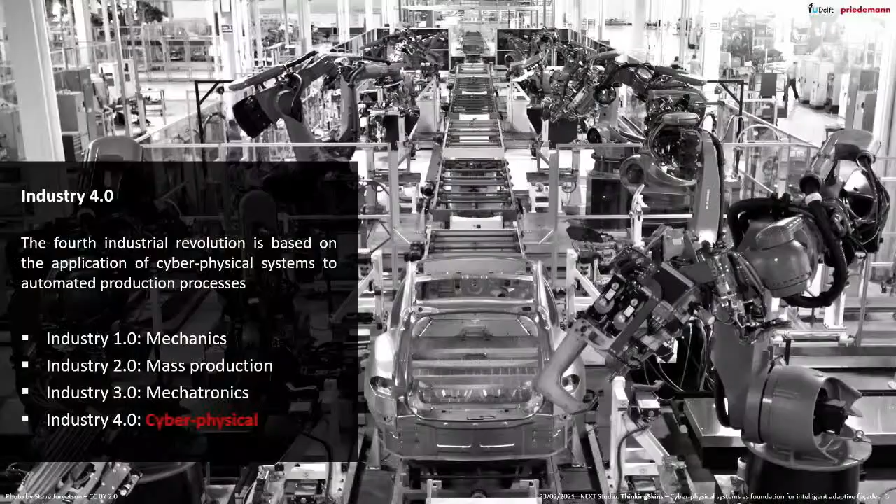And there also was one unit focusing on Industry 4.0. It was called the ITS OWL. And by coming across this, I started to be curious and wanted really to know what Industry 4.0 is about. And what I had to learn is that this addresses the fourth industrial revolution. And after the introduction of mechanics, mass production, mechatronics, now cyber-physical systems are the main driver of what they develop here as smart factories.

So this directly led me to the question, what are cyber-physical systems? Another keyword and term. There is no universal definition for cyber-physical systems today. This is because there are so many application fields, and the understanding of a cyber-physical system differs from application to application. Instead, today we use characteristics to describe such systems. They all can be described by the close integration of the physical devices and their digital control. And one key aspect, which is also visible here, is the embedding of the devices.

It means that we no longer have a central control, but we start integrating computing capacities into the devices, so we equip them with their individual intelligence, and we enable them to communicate with each other and to cooperate towards a common production objective. And why does the industry do this? Because they expect a great increase of flexibility in production processes, but also in productivity, so a greater performance of their processes. This seemed very interesting for me.

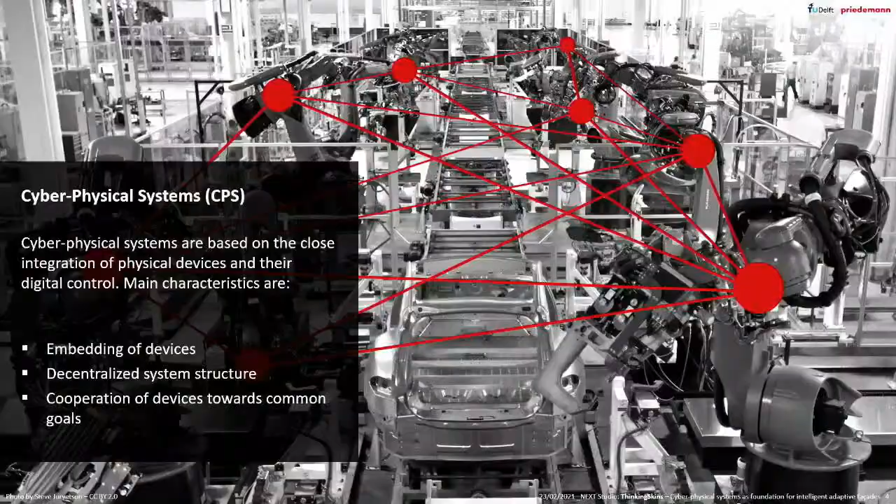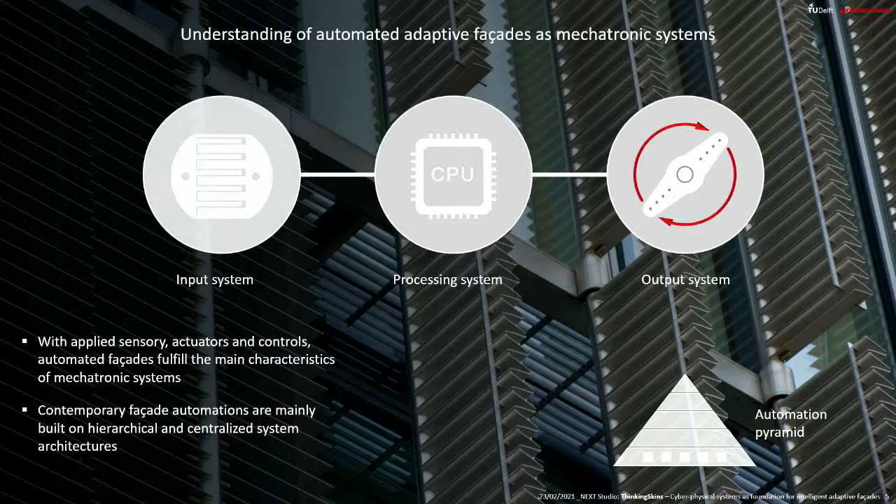And now coming to the actual topic of facades, we already know that automation is nothing really new for the facade industry. We, of course, automate many facades today. We integrate sensors, apply them to the systems. We have controllers, but also actuators that then actuate, for instance, adaptive facades. And following Jules Moloney in his estimation, with an existing input system, a processing system, and an output system, we can understand facades as mechatronic systems, which directly refers to the Industry 3.0 understanding. So it's centralized. Most of the facades today have a centralized and hierarchical control concept.

But this is the background I saw, which led me to this research question: how can cyber-physical systems be applied to facades in order to enable coordinated adaptations of networked individual facade functions? In this way of thinking, it means that the automated facade functions form a network. They communicate with each other and increase the performance by better mediating between the external boundary conditions and the user requirements that might also change. So it's actually about the shift from centralized and hierarchically controlled strategies in the facade towards a more decentralized control concept.

In order to be able to answer my question, I conducted several research investigations. They all were published as individual journal articles, and in the end formed the chapters for my final dissertation book. To give you a better understanding of what I actually did in each of the investigations, I will quickly dive into them. The first one was to identify all the relevant knowledge fields. The title of the paper here was State of the Art of Intelligent Building Envelopes in the Context of Intelligent Technical Systems. So I compared what happens in Industry 4.0 to what happens in the facade industry to get a common understanding and to be able to transfer the technology between both domains.

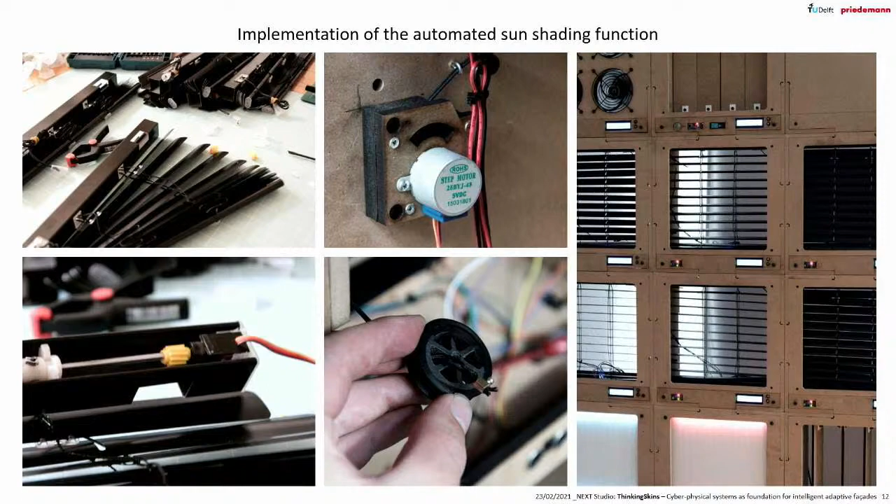It was not intended that the prototype works actually physically. It was more understood as a demonstrator, a visualization tool that helps to understand the process and the communication within the system. So this is the first function that I developed like this. You can also see I used some of my skills in digital fabrication to make my own devices, like a 3D printed wheel that then winds up the wires for the opening and closing. So in the end, you see the result on the right. This was the sun shading device.

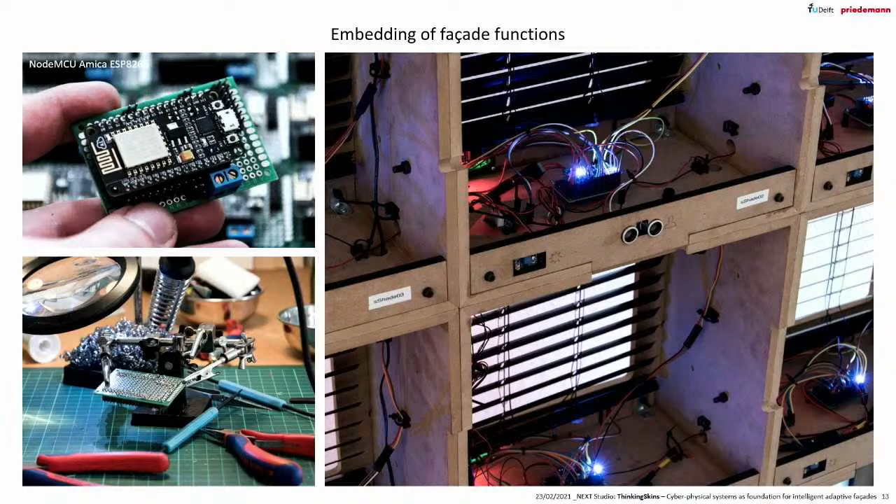A bit more complexity came up when I also had to provide these microcontrollers. I had to learn soldering and use these small microcontrollers, which were quite useful for me because they come with a network ability. They can directly join a wireless network. So I used these elements, and each of the functions that you just saw, each module, is equipped with one independent intelligence. It also has all the sensors necessary installed that help to perform the functions. So each function is an independent feedback loop, collecting all the relevant information, then processing this information, and bringing it to a reaction of the system.

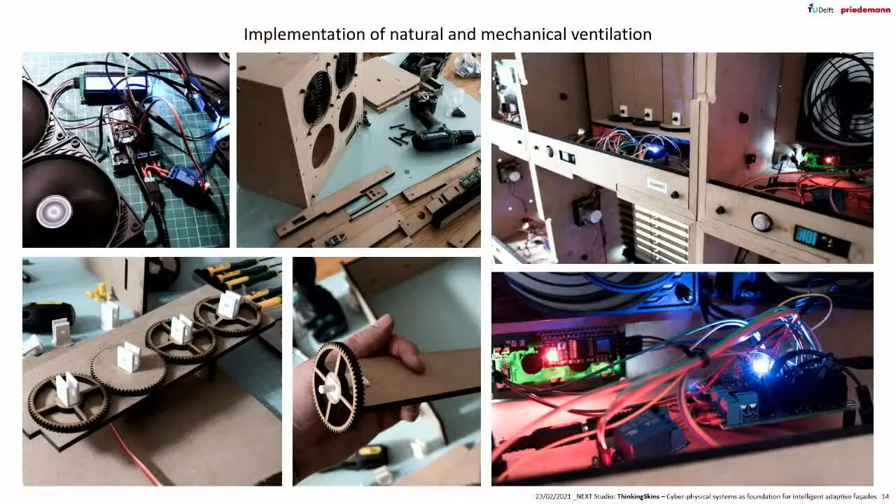This strategy I applied to all the functions that I covered in my prototype. What you see here is the development of the ventilation system, which is covered by natural ventilation. Here I again digitally fabricated a gear system on our laser cutter in the university, and I also 3D printed these small devices here and assembled them. Everything was considered to be plug and play. This was also the reason for me to start learning soldering, because this can easily be disassembled, and it was quite important for me to make sure that if something fails in this more high-tech solution, I am able to just replace broken devices.

The other ventilation is the mechanical ventilation. Again, I used a standard product, which is just a computer fan, and you can say I tuned it, hacked it. It was then possible with a relay to switch it on, off, or also change the speed by PWM. So after finishing all these functions, I had some kind of a playground with different working functions that I could start playing with the communication.

What you can see here is the realized functions on the right side. By the way, I didn't expect so many LEDs placed into these devices, so when it was finished around Christmas, it saved me the Christmas here, and there was a lot of illumination. This is no photo art, it just came from the pictures that I took because of the illumination here.

What you see is the realized prototype, but also here the communication comes into play. So I installed a router and the server, which is the platform for communication within the system, and I also added the power supply. Up to 5 volts, I was quite fine. This then added the 220 volts, where I felt a bit more in danger.

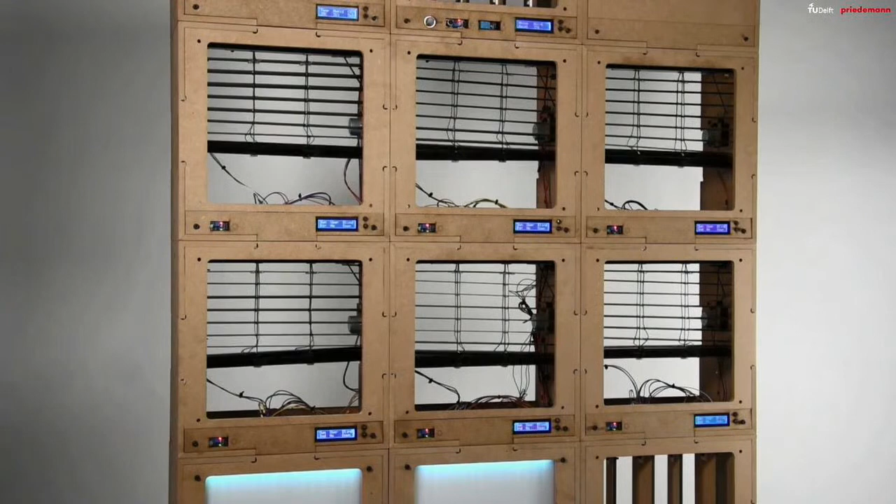I could talk much more about how I realized this prototype. Maybe it's easiest to just show it working, and this is why I show this video. What you can see is just the individual functions, like the shading system that opens, closes. I also installed displays, which helped me to evaluate the measured sensor data. You see all the technical stuff integrated here, and I was quite happy that all the functions directly worked.

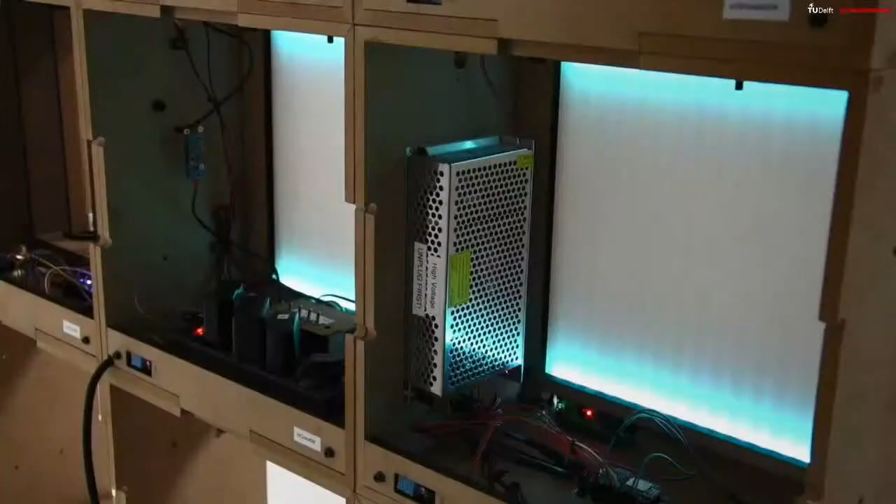In the back you also see the sensors, the light sensor, a distance sensor, which could also measure a person that approaches the facade. Here you see again all my switches, the power supply, and in the background it's the heating and cooling function, which is demonstrated by the blue and the red LED illumination.

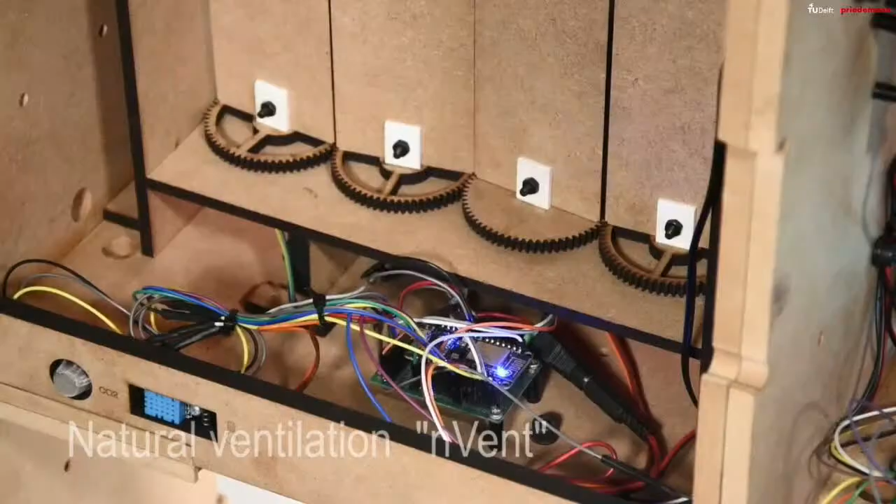The next function here is the gear system for the natural ventilation. Again, you see the applied microcontroller as a local control. The sensors installed are a temperature and humidity sensor and also a CO2 sensor, and it could visualize 3 states like open, closed, and half open. And last but not least, the mechanical ventilation. I just explained also that different speeds and on and off were possible with this function.

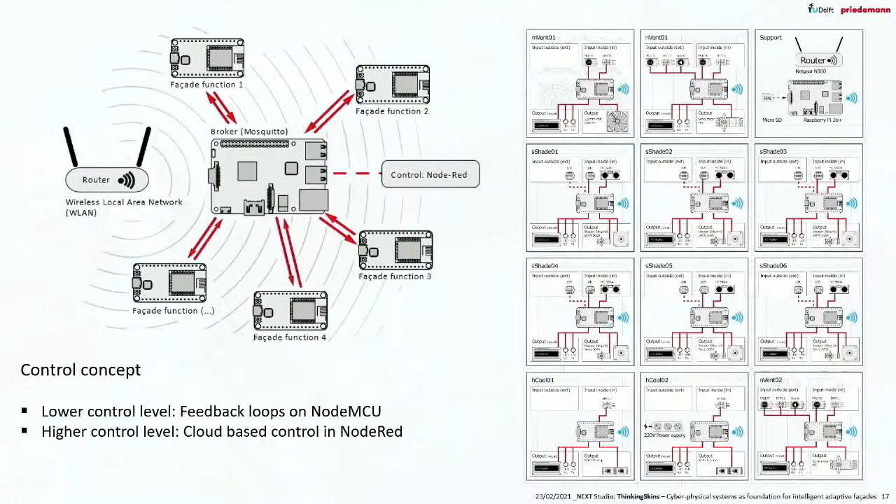What you just saw is the feedback loops on the lower control level. So it happens locally within each function based on sensor data. More interesting it became when communication came into play. This means that there is a second higher control layer where all these aspects of the prototype communicate with each other. And again, I could explain a lot about MQTT, machine-to-machine communication, but maybe it's just easier to demonstrate what happens here.

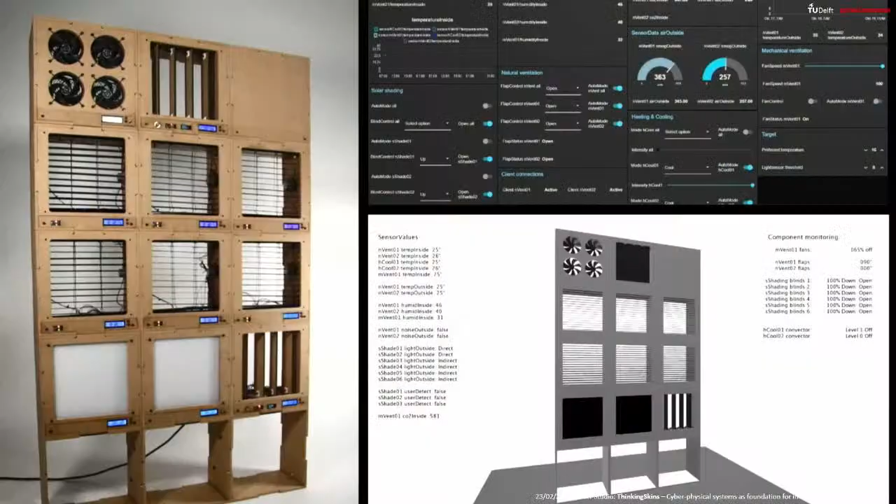Each LED that you see here blinking means that a message is sent from one of the modules or received. So all these functions communicate with each other, but also with the digital representation, the digital twin, which receives the information. And also the user interface was an important aspect because it enables to interact with the system and to validate what was going on.

How to evaluate the system in the end? I mean, of course, I saw that some things were working, but to evaluate the potential of communication, I did these small scenarios that I imagined. Again, it was not about the physical performance, but more about visualizing how the communication could help in a facade. In this situation, the natural ventilation also has a noise acoustic sensor.

It receives a disruption, and it knows now, okay, I should close the natural ventilation. But it doesn't only close, it also tells the mechanical ventilation that this is the case and hands over the tasks. And after a while, when the signal is lost, it takes the job back. So this was just one scenario to prove these two functions can communicate, they can talk and share information throughout the system. I did this with in total 5 scenarios.

I will just show one more, what I called community decisions, because what you see here is different instances of the sun shading module. They all receive the information that there is some light and they should actually provide sun shading. Just one function is tricked with some tape, so it gets wrong information. And what happens on the higher control level is that all the others say, you received the wrong information, and they override what's happening in this local control level. So again, these functions communicate, and in the cloud, decisions are made that can also help to get more flexibility within the system.

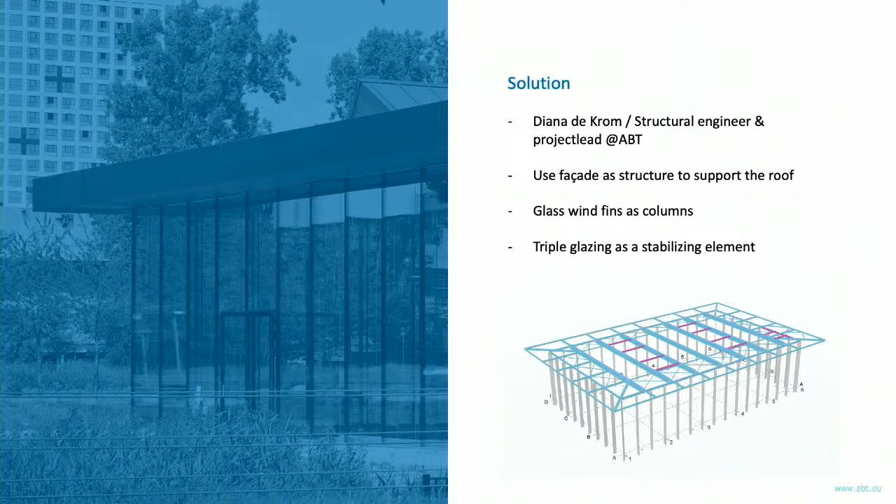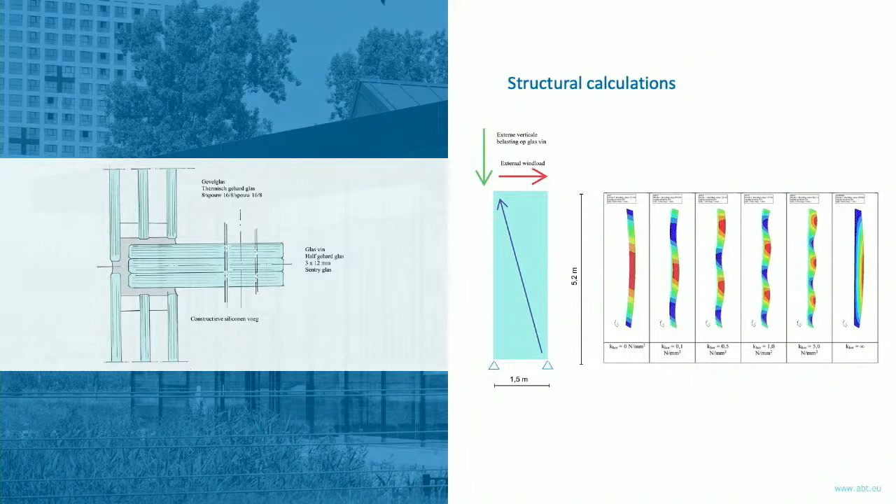Next step is how to make calculations about these structures. They made elaborate calculations, and they researched all the different scenarios that were possible for the loads and the structure. I'm not a structural engineer, but I was really impressed by the schemes that I saw in the project folder. You see the image of one of them on the right. And it turned out to be possible to execute this design.

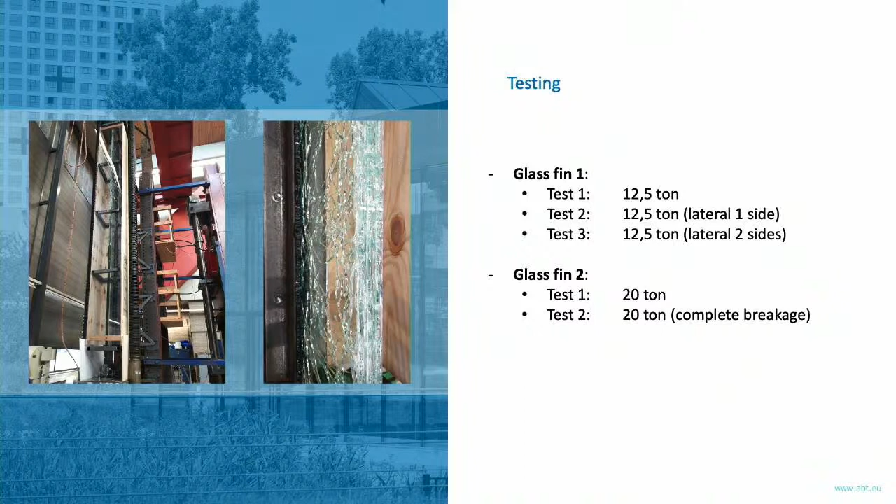But the calculations by themselves were not enough. So Diana thought it was a very good idea to test it in practice. Together with the university, the TU Delft, they executed these tests. As you can see, there were quite heavy tests on the first glass fin. They executed a triple test of 12.5 tons in 3 different ways, with 1 lateral breakage, with 2. And they all succeeded. Then came the second test, which was even heavier. The last test was with 20 tons and with complete breakage of all 3 layers of glass, so the fin was only connected with the structural interlayers. And it succeeded as well. For 10 minutes, it could bear the load of 20 tons, with a fin length of 5.2 meters. So quite remarkable.

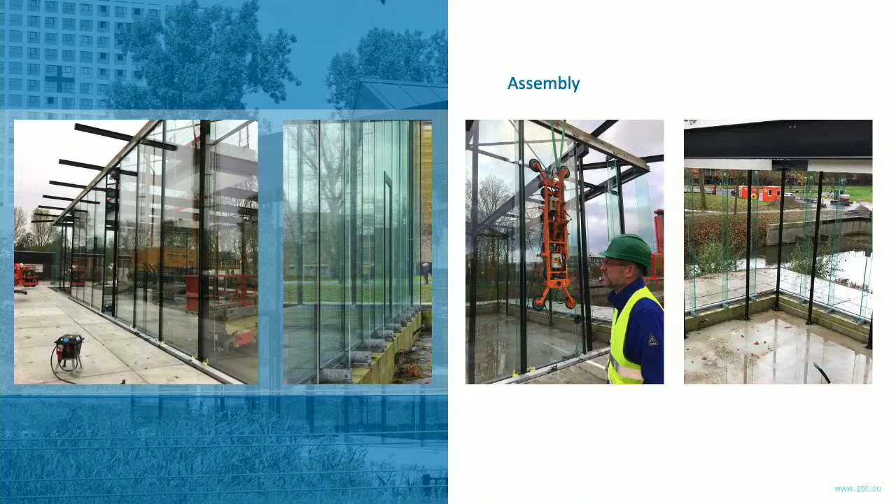Okay, so the calculations succeeded, the testing succeeded. Next step was production and assembly of the elements. Here you see a few pictures of the assembling process. Quite large panes, quite heavy elements, and it had to be temporarily supported by some very light steel columns. But when every glass fin was in place, they removed them, and the architectural roof really landed on the fins, and it was quite a remarkable result. So here it is: a fully glazed facade with no steel structure, completely bearing the loads of the architectural roof.

And in the end, also with some nice sustainable results, because glass has a lower CO2 footprint than steel. It's recyclable, and using only the glass really saves material in the end. So this is story 1. So this shows that by looking in a different way to facades, you can come up with really nice results.

Yeah, the second story. The second story is about the Naturalis Biodiversity Center, and maybe you know, maybe you don't, but it's two things. It's a research institute, and on the other hand, it's a natural history museum. So it was a renovation, and they also planned a new building next to it. And what you see here is the facade of the new building.

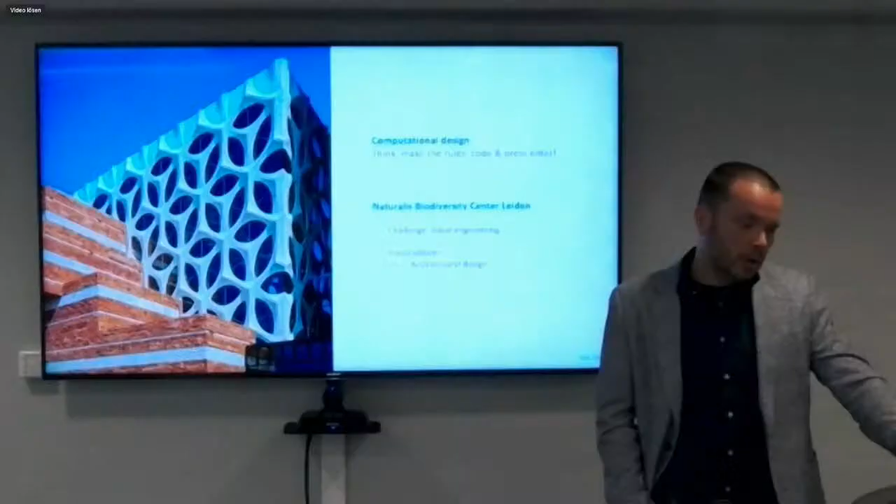ABT was commissioned by the architect, Neutelings Riedijk Architects, to take care of the structural design and also the site supervision. And during this assignment, we were challenged to optimize the crown facade, as they call it, and it's the white facade, as you see on the picture.

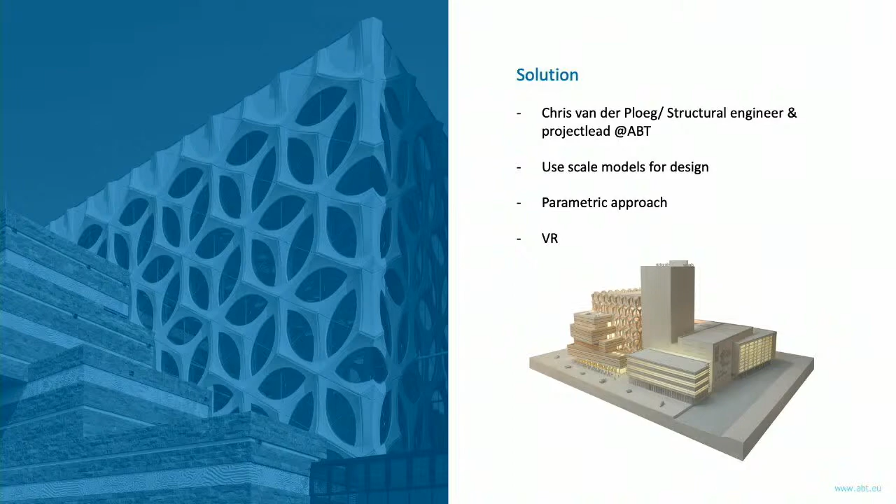My colleague Chris van der Ploeg and his team started working on this, and they used all different kinds of methods for it. They used the scale models that were available, and step by step they came to the solution that a parametric approach would be very useful for this project. So in the very beginning, they made a 3D model, as maybe you can see on the left, and it was in AutoCAD. But soon they switched to Revit to use a better 3D model software for it.

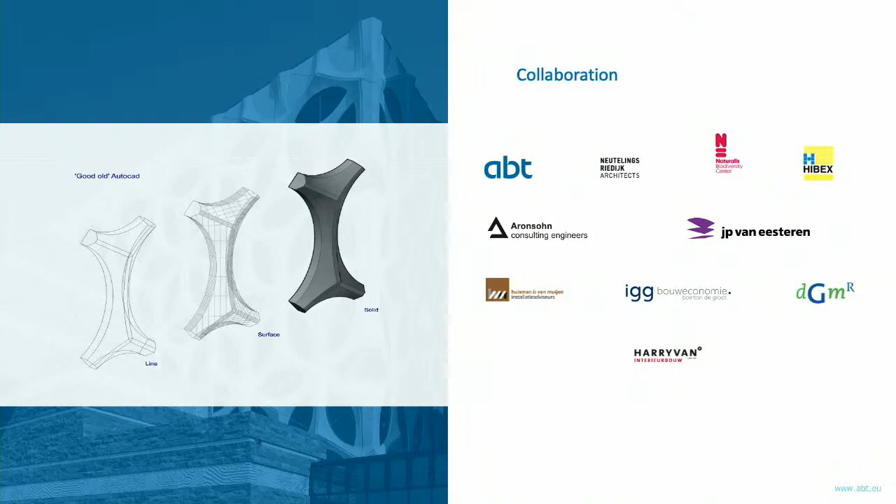According to Chris, parametric modeling requires a different mindset. And he explained it to me in 4 steps. He says, well, first think. Second, you have to make the rules. Third step is coding. And if you do it in the right way, you only have to press enter. It seems really simple. Maybe it's not. I will show you in the next few slides how it works according to Chris.

So first step, think, seems logical, but sometimes it proves to be difficult. So it's good to realize that the thinking process really is one of the most important steps in this parametric approach. The second one was make the rules. Make the rules is 2 things: defining geometry, but also defining the rules for the design.

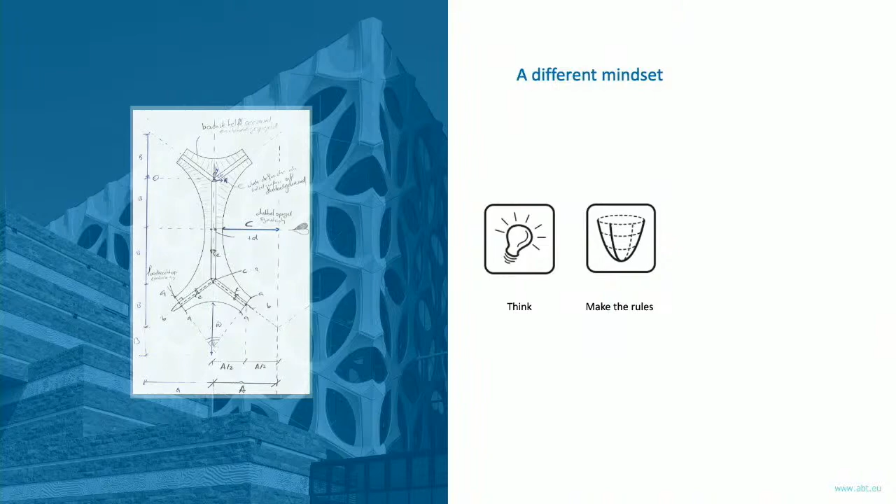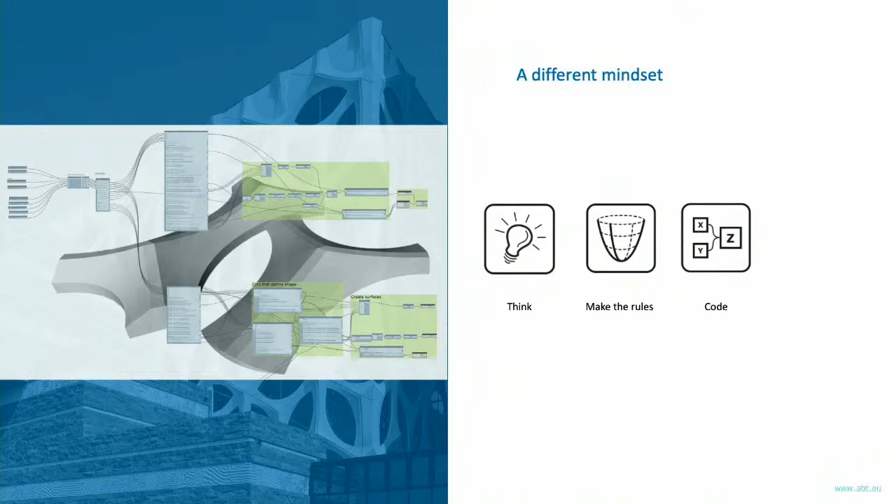And as you can see in the sketch Chris made, he really analyzed the shape of the facade. And after he did so, they started to code, and they used 2 software programs for it. The first one is Dynamo, and the second one is Grasshopper. And they managed to code this facade model and to link it to Revit. And after they succeeded in this, they were able to press enter.

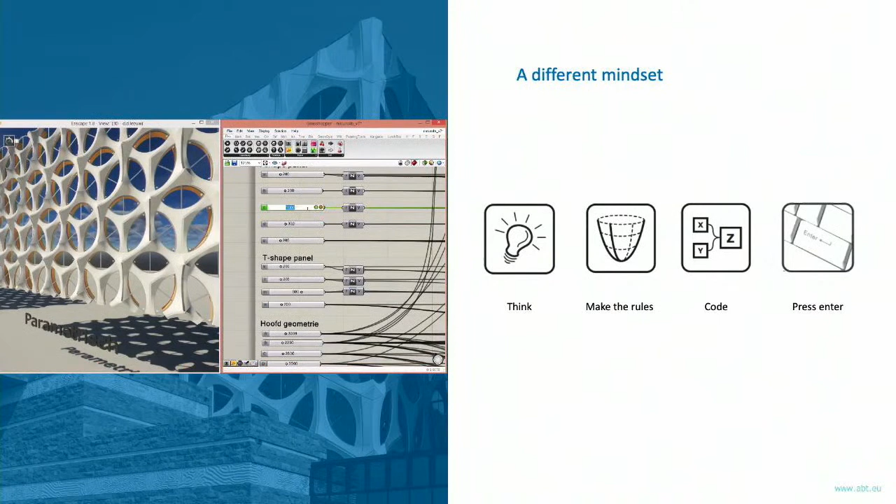And as you can see in the left image, you can see the changes in the facade. As the values change, you see the facade appearance also change. So maybe this one goes a bit quick. I can try to do it again. So the green values are the changes they make, and you see in the image of the facade what the effect is on the facade.

So in this way, they could look at all kinds of scenarios for the dimensions of the facade. And they also could analyze it in a proper and very elaborate way. So after they succeeded in this analysis, in this parametric model, they looked for a way to communicate it with the architect, with the members of the design team. So they decided to do this with virtual reality.

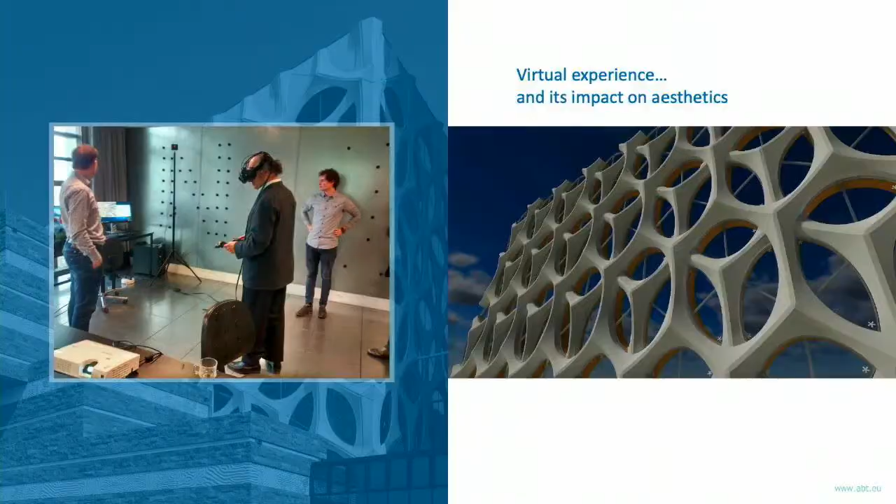So this was in the office of ABT. We asked the architect to look at his facade, and this is what he saw. So a virtual real-time experience of the facade. And he was able to make his choices, the right choices for him, but also for all the technical aspects that were involved, and also for the logistic aspects. And let me show you the results of this experience.

And what also was quite nice is that we managed to reduce the number of truckloads for the precast concrete facade elements by half. So there were 200 truckloads less needed than in the original design. So also quite nice sustainable benefits.

So that was my second project. I have one to go. And I saved this one for last because it also took the longest from the start to the delivery. We started with this one. First of all, it's about the Forum in Groningen. And it's a really big building in the center of Groningen. As you can see in the environment, it's like some kind of big rock has landed in the center of Groningen. And it has really specific characteristics.

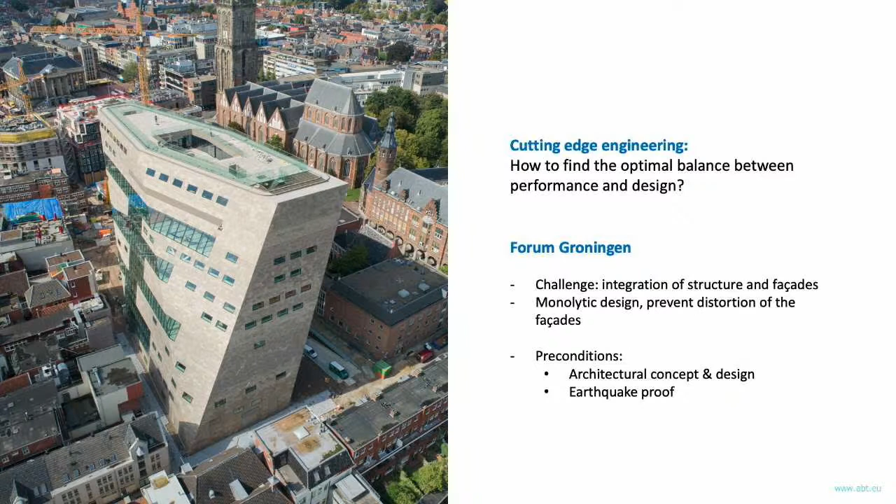We started in 2007 with the design team. And first, ABT was approached for the structural engineering. But soon after, we also were asked for all kinds of other engineering services, and facade engineering and facade consultancy was one of them. And a really important one, because the facade is really expressing the concept of the building. I was told it's meant to be a monolithic design. And that means that any disturbance and disruption of the facade has to be avoided.

And it's quite complex in a way, because it's such a big building, and it turned out later that it's also in an area where we have earthquakes in the Netherlands. So that made it extra complicated. But in the beginning, we didn't know that. So we just started with the design.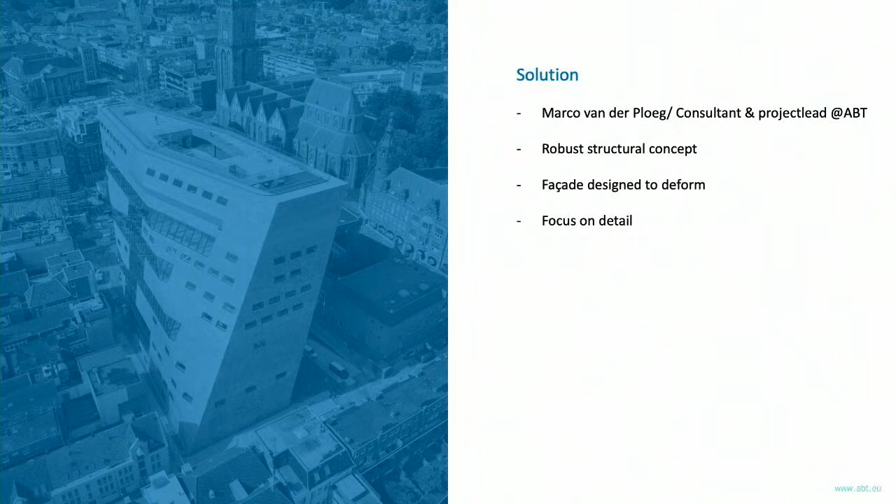My colleague Marco van der Ploeg, as far as I know, not related to Chris, but they have the same last name. He's a consultant and a project lead at ABT. And he took up this challenge with his design team. And he told me two things about the project.

The first one he told me is, okay, when you want to design a facade which you want to have no detail, you better start detailing, and you better do it well, because it's really crucial to the result. And the second one is, he told me that in all the decisions and all the choices they had to make in the design stage, the concept of the building and the concept of the facade was leading. So those were two rules Marco told me they started with in this project, and they continued it till the day of the delivery.

Oh, I have to go one slide back, actually. Yes.

What also was important were three main topics in the design. The first one is the structural concept, because the structural concept and the facade design are really strongly related to each other. And it all has to prevent all these distortions and disruptions in the facade. So it was a very important topic. The second one was that the facade is designed to deform, and that's different than many other facades. And the third one, I already told you what Marco told me about detailing: keep your focus on details. So those were the main topics for the design.

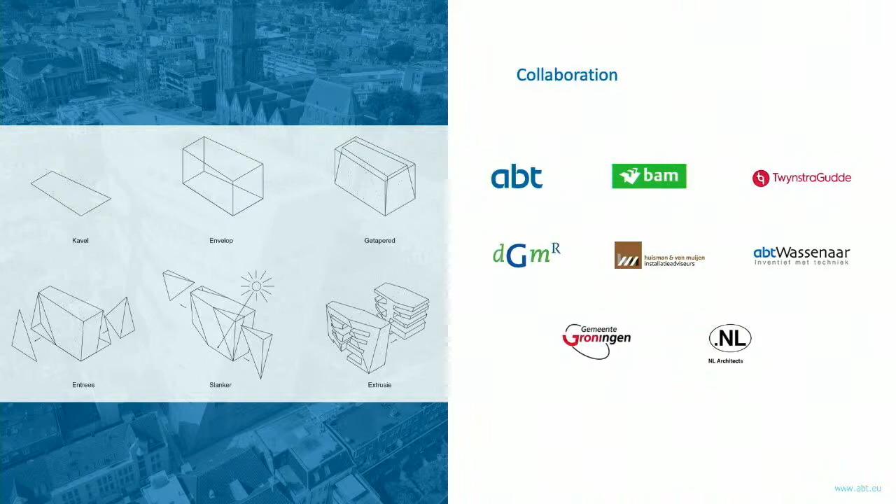Here you see the companies that were involved in the process, but also on the left side, you see how the creation of the shape of the building, and also the creation of the facade, happened. It was a really awkward plot, and they kind of used the shape of the plot to shape the building. And this is the way the architect did it.

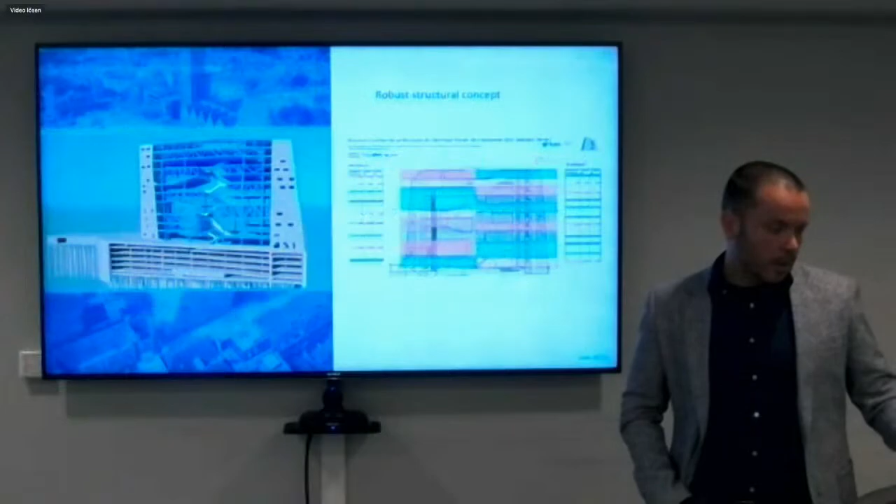So the shape was translated into this structural concept. On the left, you can see two concrete cores, and they are connected with a steel bridge structure. And it's very important because with this connection, you can avoid dilatations on the cores. So we don't have to make these dilatation joints where the cores meet the steel structure.

And it was also very important in 2012 when the earthquake problems occurred. Of course, the structure had to be reinforced at quite some points, but the concept was strong enough in itself that we didn't have to change the concept.

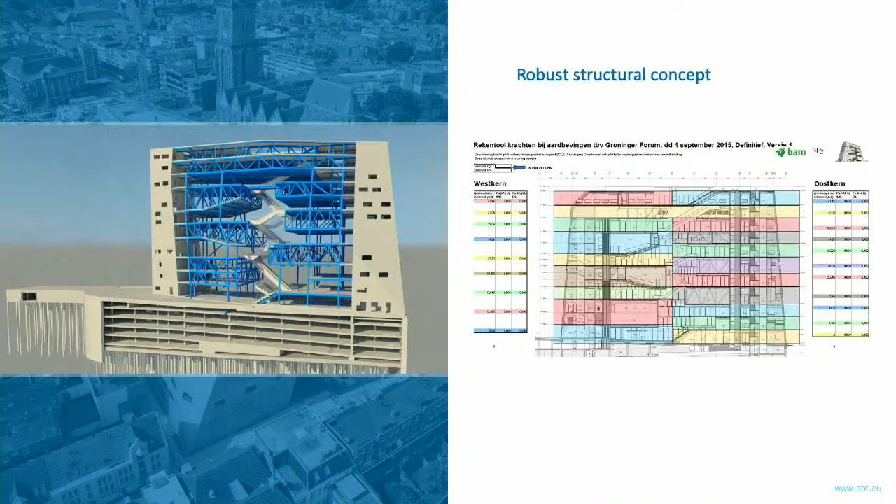And on the right, you see a seismic analysis, which colleagues of ours, ABT Wassenaar, made, on all the different layers and all the different zones in the building. And adjustments were made, but the structural concept was so strong that it could be maintained in the project, which was really helpful in the designing of the facade.

So, step 2 was, okay, we have this structure and we know what it does, and you see that it has really limited tolerances in the right sketch. The max tolerance, it's bending like 25 millimeters at the most. So that was also a starting point for the facade.

So we made a choice for a unitized system, and all the horizontal lines are functioning like a laundry line. So the unitized system is hung on these lines. And it functions more or less like a snake skin.

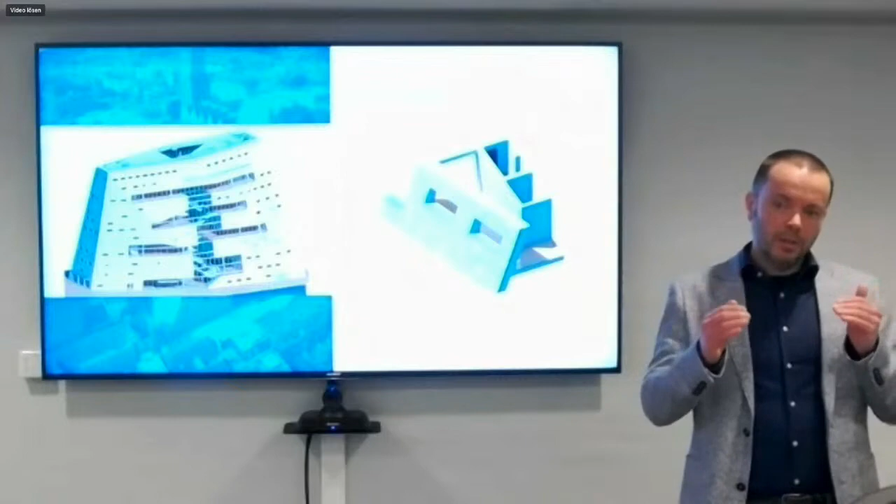Another special feature is that the facades are not at a 90-degree angle related to the central axis. And since they also have an angle to the vertical axis, the openings are not rectangular, but they have a wedge shape. In this picture, you see the concept: we have these rectangular boxes, they start with the central axis, and the openings are shaped around these boxes. So this is how the wedge shape occurs.

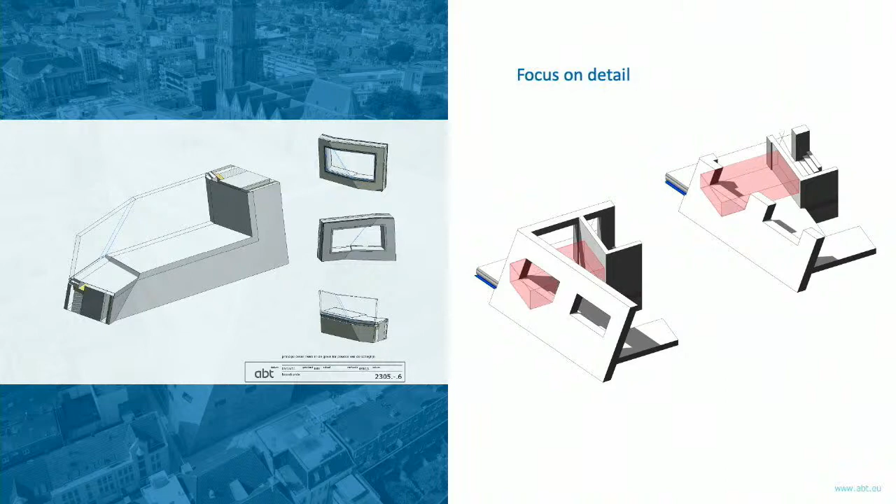And we really insisted on this principle, as you can see, even when facade surfaces rotated. So this was really consistently applied on all openings.

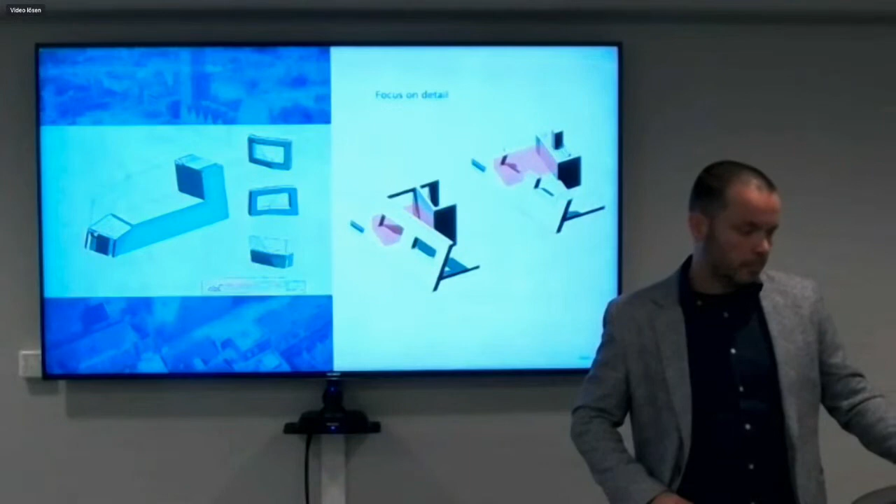I talked to you earlier about the focus on detail, and what was quite remarkable was that in the different design stages, the concept of the details hardly changed. Of course, because of seismic analysis, a few changes were necessary, for instance the bonding of the structural glazing. It's a bit different than in the DD phase.

And also the brackets to attach the system to the structure are much heavier than they were in the DD phase. But in the end, it was all complete flush detailing over the whole facade. The natural stone is really flush with the outer line of the glass pane, and you see it in the complete facade.

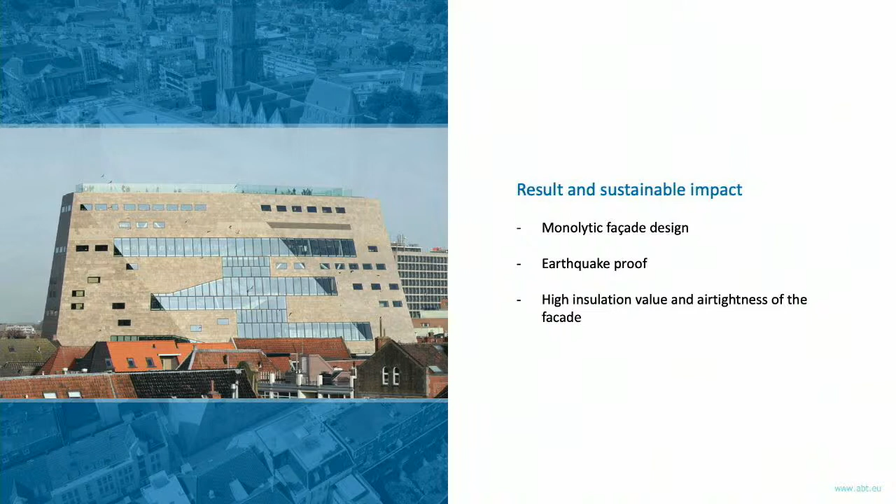So after 12 years of engineering, this is the result. For the time when it was engineered, it was really advanced engineering, and we were really proud of the result. I think we really managed to realize a high-end facade on this project.

Okay, I guess I'm running out of time a bit. I have 2 slides to show. Because we have these 20 minutes, I have to make choices, and I really want to show you 2 projects. The first is the Boijmans van Beuningen Depot, for which we were responsible for the facade design. The second one is Crystal Houses, in which we also played a key role in the facade consultancy. Maybe you could see it as a cliffhanger for next time, as we hopefully can meet in person.

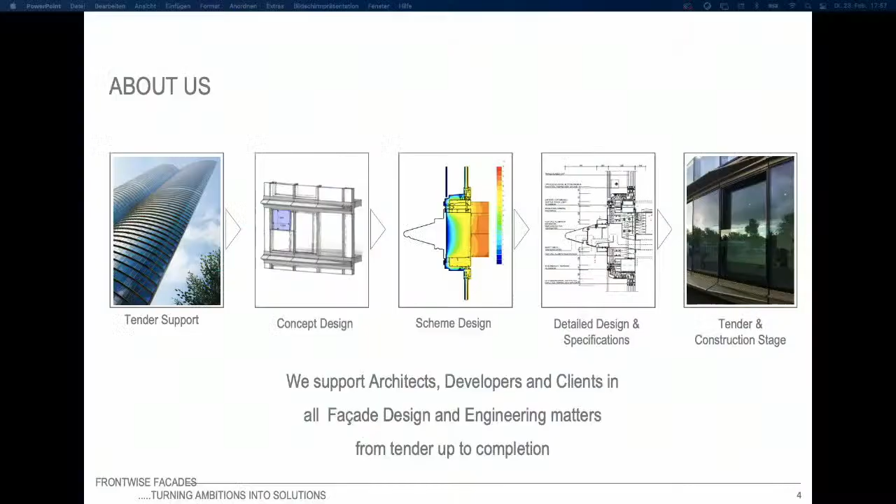We do the traditional facade engineering as you're used to. So we provide engineering services to architects, developers, and clients during tender stage all the way up to completion. But we do a variety of projects. We also do feasibility studies for circular and sustainable facade solutions. And we support policymakers in all facade-related topics. And today I would like to focus on those feasibility studies and supporting policymakers.

So the municipality of Amsterdam asked us to help them in developing the building envelope. The building envelope is something that they reach out with during a land tender in their land tendering system. So Amsterdam owns about 70% of the land in Amsterdam, and has the opportunity to actually set higher targets when they tender their land. And they are aware that building to national regulations doesn't give you a quality standard, but it's really just a minimum requirement.

So what we did, we helped them, we developed a guideline, which is called the Assisting Informed Design Guideline. And in this guideline, we talk about circularity, energy efficiency, biodiversity, heat island effect, etc. And this helps urban designers to understand that the ambitions that they have and the policy that they make actually really has consequences for the facades that are being built. And in this guideline, we set achievable requirements for facades.

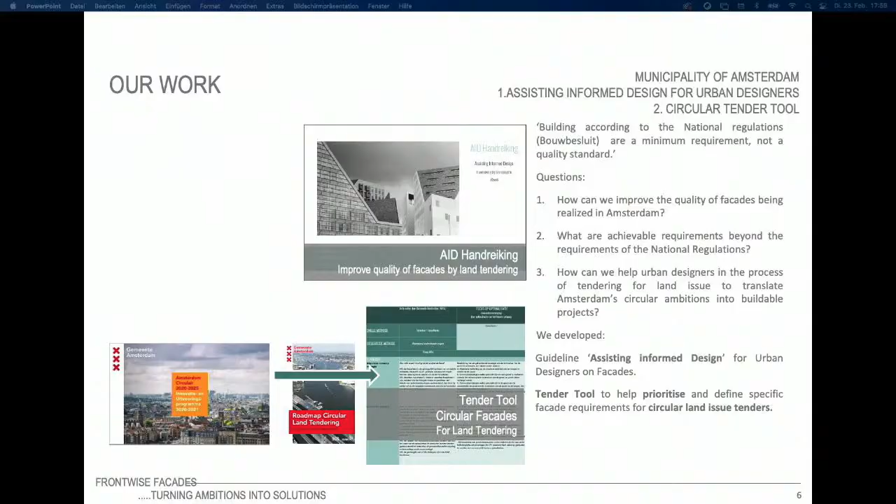Also, Amsterdam asked us how can we help urban designers in understanding and showing the project teams what they really want, what those ambitions really are. So we basically translated the information that we put in the guideline to a circular tender tool. This circular tender tool really pushes developers and urban designers to talk together, to discuss what targets they are setting for their projects. And because this circular tender tool will be part of the contract between the urban designers and the developers in the tender stage, it really pushes them to commit to the targets that they set.

Another project that we did is a feasibility study of extended producer responsibility. This was commissioned by the Dutch Facade Trade Associations. And the reason that they were looking into this is because extended producer responsibility will really accelerate the circular economy in facades. And so we looked into this.

So first, extended producer responsibility is something that happens in other industries. It basically means that the supplier is responsible for not only supplying the product, but also the disposal of the product. So throughout the whole life cycle of the product. We looked at this from a technical and organizational perspective. And the other project teams, Copper8 and Hout Advocaten, looked at this from a legal and financial perspective. And as part of this project, we conducted around 50 interviews. I will elaborate a little bit more about the different service levels further on in this presentation.

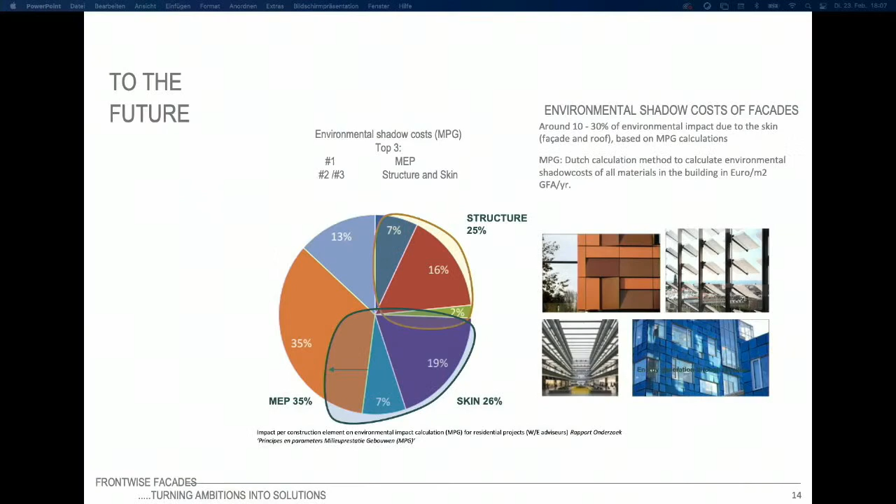And you can see that at the top, if you look at the top three, number one impact on the MPG is MEP, but a very good and important second are structure and skin. So it is very important. And if we look at the energy requirements, and we have to include solar panels in our facade, it will increase even more. So enough reason to talk about the material transition.

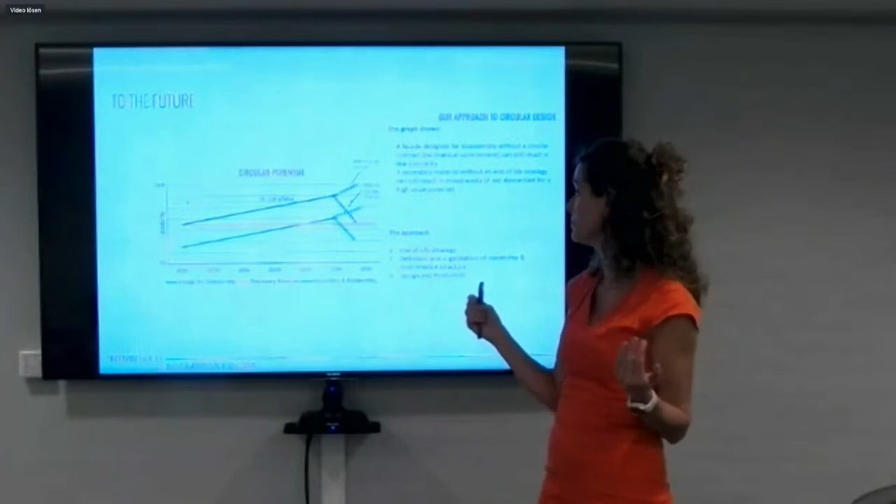And then if we look at the end, you can see that if a product is designed with a circular contract, which means a financial commitment of the owner to actually reuse the product at the end of the life cycle at high residual value, then your circularity increases. If you don't have that contract, it dives back down.

So we have a different approach to the design of the facade. To ensure that you have a circular design of your facade, you have to start at the end of your life cycle. You have to start your design not with your product design, but with your end-of-life strategy. And only then you talk about how are we going to do it? Who is the owner of the building? How are we going to organize maintenance? How are we going to organize finance? And only after that, you can start designing your facade.

So what does this end-of-life strategy look like? It's basically a combination of questions you have to ask. What do you know about, for example, 2050? What is 2050 going to look like? Or maybe it's 2060, we don't know. So it will be a kind of guesstimate.

So from an organizational perspective, think about who is going to disassemble my building. And after it's disassembled, who is going to store it? Where is it going to be stored? And when I have a pile of facade elements, who actually wants those facade elements? Or if I have a pile of dismantled facade elements with screws and glazing, triple glazing, double glazing, whatever, who really wants that of a certain size? So you can design for disassembly, but if no one really wants it at the end of the life cycle, nothing's going to happen with it, and it's going to be downcycled.

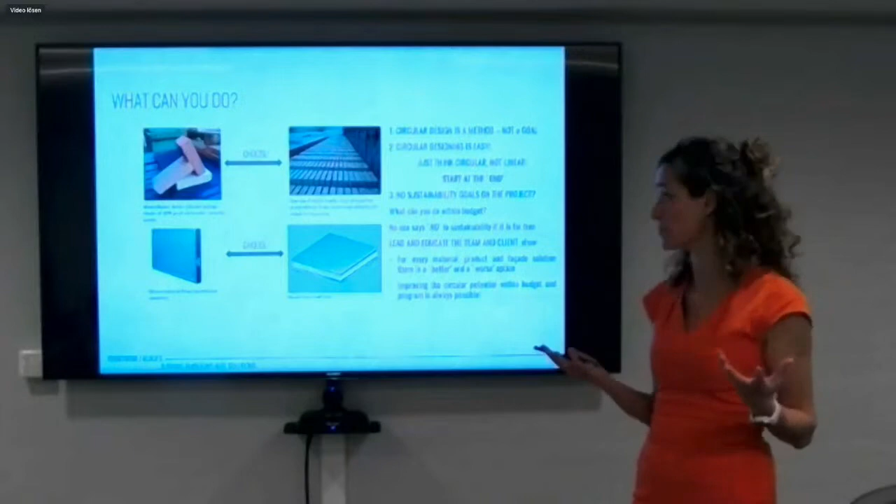And if the client doesn't have any sustainability goals on the project, think about what you can do. Nobody will say no to sustainability if it is for free. So I would just encourage everyone to lead and educate your team and your clients, because for every material, product and facade, there is a better and a worse option, and you can always go for the better option. And improving the circular potential of a project is always possible.

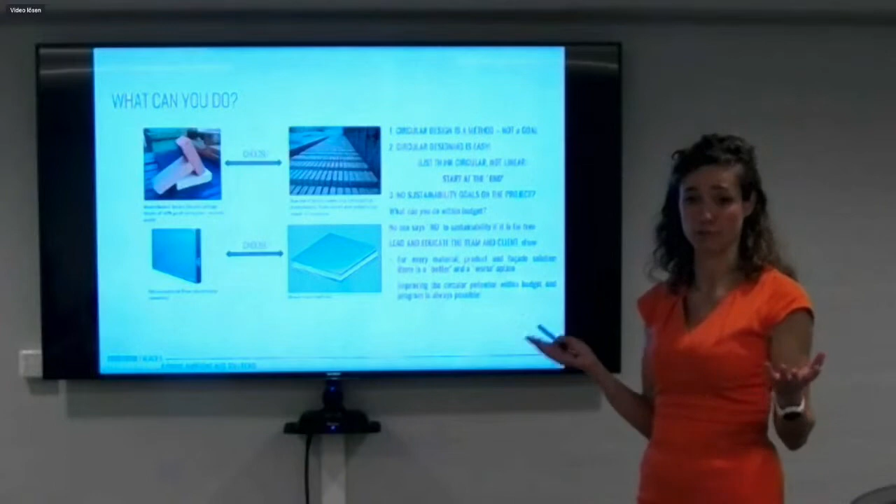You start. Very impressive. Great presentation. Thank you for that. Interesting field. I mean, we all working in that field know how difficult it is to convince our clients to follow that path, right? There are all these beautiful concepts, and there is the reality we suffer on.

When you speak about circular economy, you use the term economy. How is the situation in the Netherlands? What is providing you with an infrastructure, rules, regulations to push this into the attention of your clients, just by what you have in the Netherlands specifically? That would be interesting for me.

Yeah, well, I think in the Netherlands we are quite far ahead. So everybody knows about circular economy. Everybody has their opinion. Everybody has really their own translation of what is circular economy and what is circularity in general. So I think everybody would like to hear about it. But I've been in projects, in tenders, where they really said, well, let's just start building to national regulations and then let's see how far we get.

And yeah, although that's not really encouraging, it is how the world is. So that's why I would like to encourage that even within budget, you can do better than worse. And if you just think about it and just make a decision to go left or right, you still do a little bit.

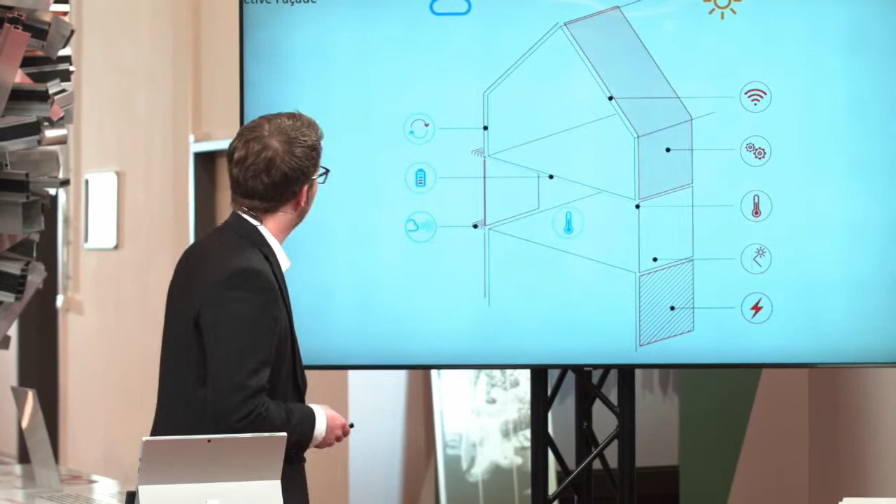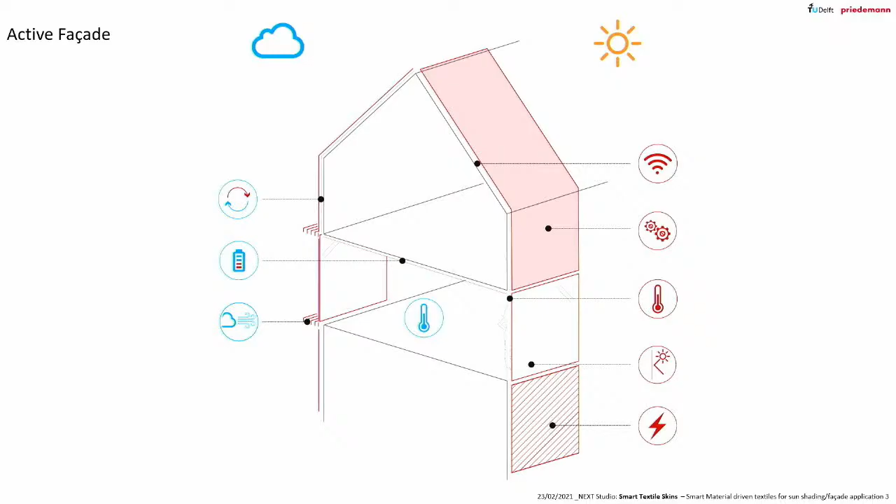First of all, as head of R&D, I'm working with our Priedemann Facade Lab, our knowledge hub on facades, where we try to experiment within our workspace novel facade systems, exchange ideas, show within our showroom in Berlin products, and we do the thinking, we do R&D, and the driver for this is that we aim for an active facade, so trying to bring things together, developing novel ideas, integrating technologies, new materials into the facade to enhance the performance of the facade, but also enhance the user comfort.

Also a driver for this is the issue we all know, climate change, sustainability, and as you can see, the Intergovernmental Panel on Climate Change also will put in their next paper the issue of built environment, focusing on pushing this tool we have here. And as you know, building construction sums up to 50% of global resource consumption. More or less we talked about this today already. And also the energy demand within the European Union is summed up 40% from building construction. So there's a lot of things for us to tackle.

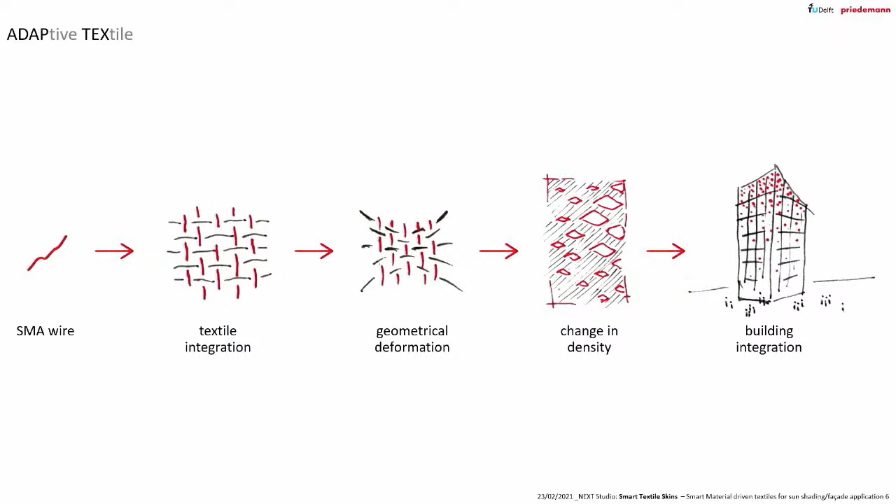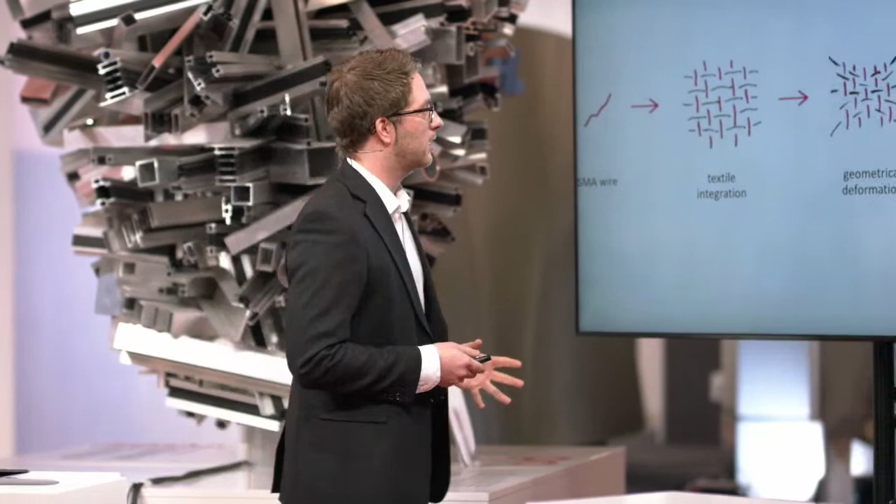And I want to show one project within our R&D department we're working on, which to some extent tries to find solutions for these, which is called Adaptex. So it's an adaptive textile. And we develop a system which is based on a shape memory alloy, a rather small component that we, due to textile integration, can scale up into a bigger surface, and then using the smart material within the textile structure to perform geometrical deformation that then results in the change of the density of these structures that then can be used within the building skin, for example, sun shading, ventilation, and so on.

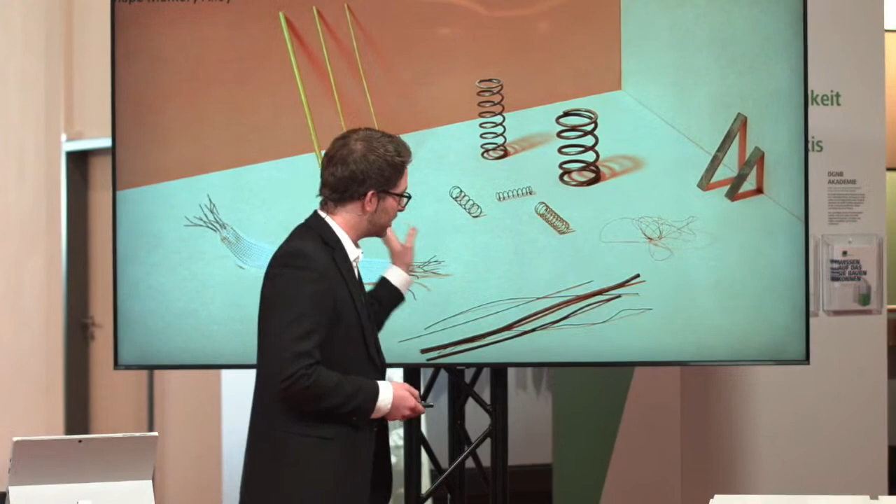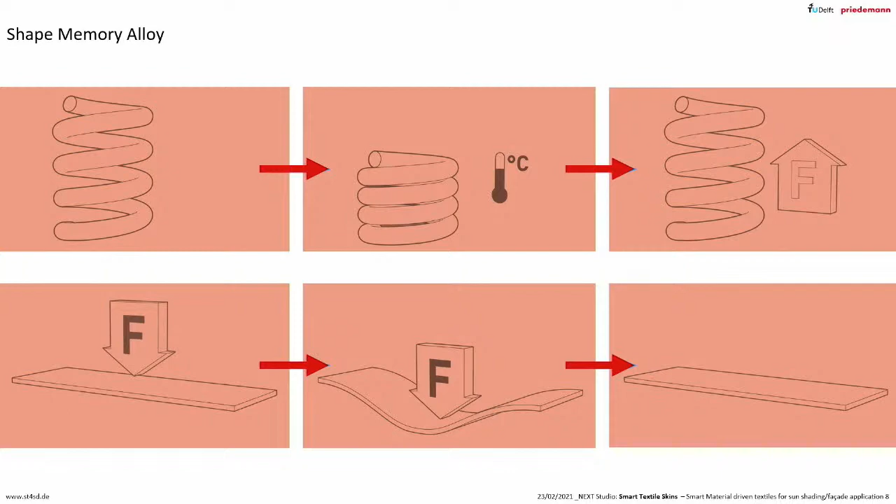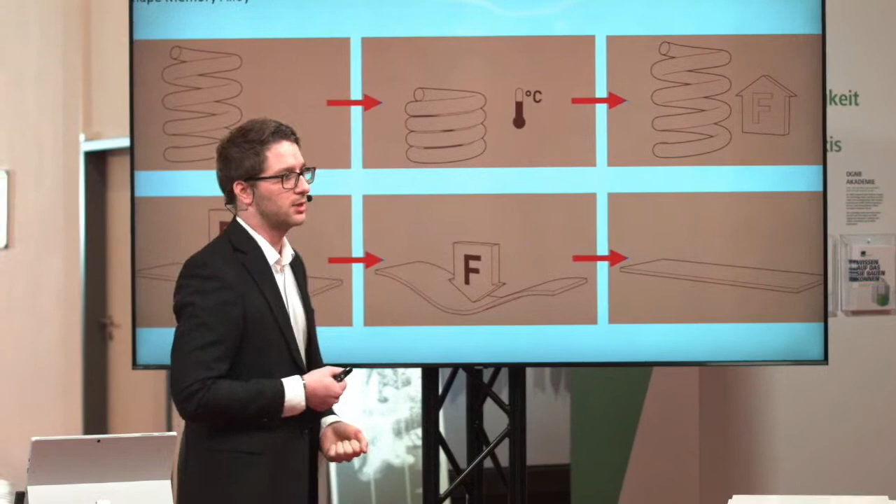First of all, coming back to what is shape memory alloy. It's an alloy normally out of nickel and titanium that can be developed in various forms, as sheets, as wires, as springs. And the interesting thing about the shape memory alloy is the smartness of the material. So it actually reacts to thermal influences on the material. When it heats up, it deforms into a trained geometry. And when it cools down and a force is applied, it moves back into its original state. So you're able to train the specific performance you need into the material. And therefore, you can use this as an actuator within the system.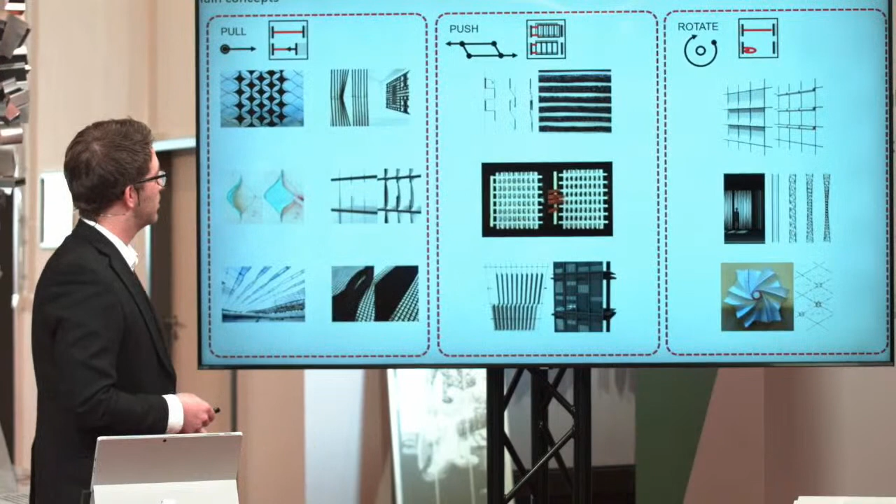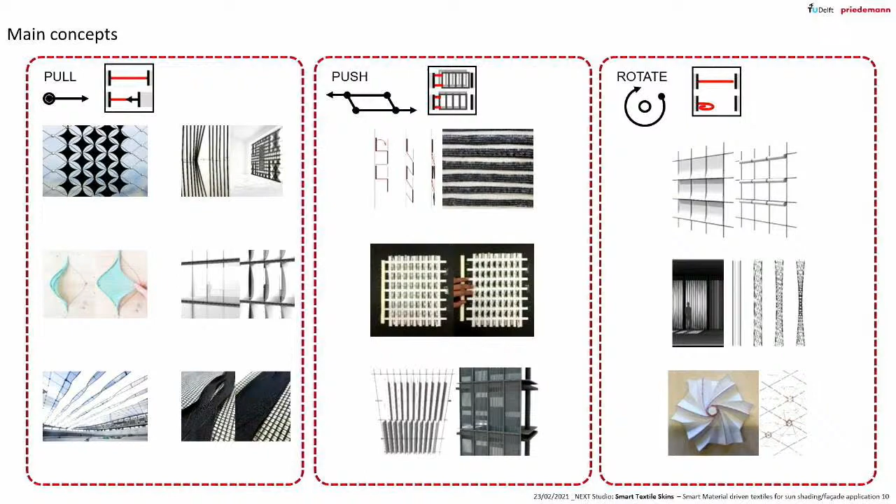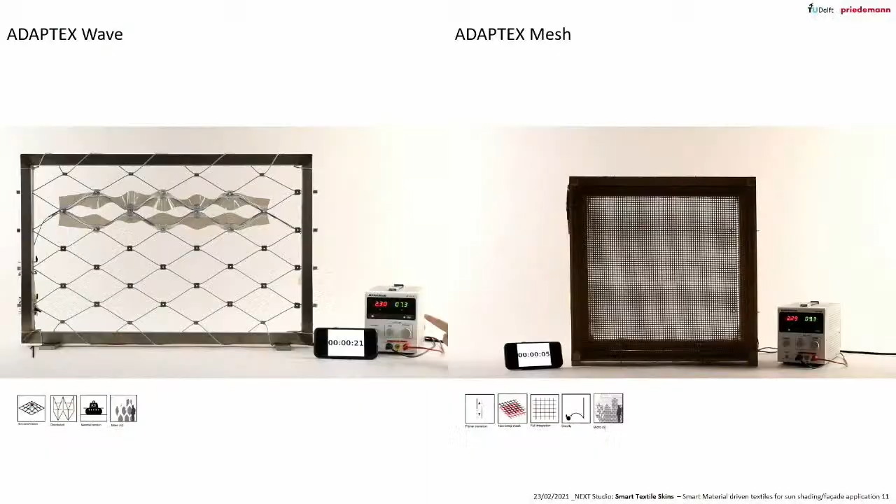Then within Adaptex, since there are a lot of things coming together, we started with a design matrix where the various disciplines that collaborate in this project brought in all the requirements from the smart material, from the textile design and construction, from facade engineering, and also from architectural design, creating this scheme, which then led to various first small-scale prototypes and designs, concepts how this textile facade system could be developed, in 3 main schemes, pull, push, and rotate, that then were narrowed down into 2 main concepts. On this side we got the Adaptex wave.

As you can see, it's a continuous textile band that is, due to the integration of the SMA, changing shape. And the next one is Adaptex mesh. It's a 2-layered mesh textile that, due to the integration of the SMA, can move against each other, and by this change the density of the overall structure. Going a little bit more into detail of these systems, in the next step we developed a first demonstrator, 1 by 1 meter, where you can already see the evolvement.

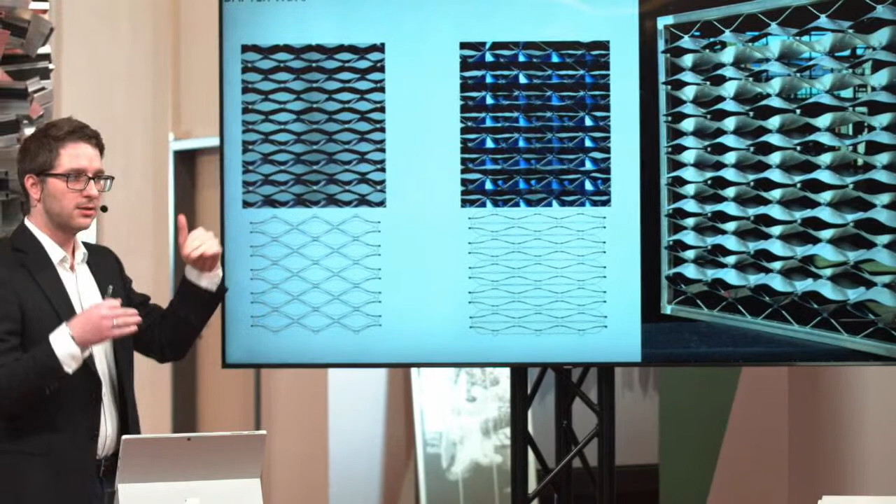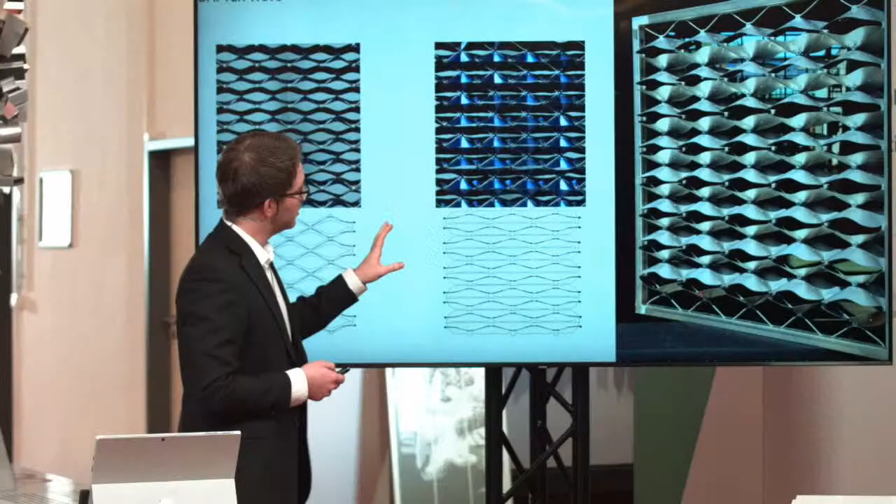In Adaptex wave we have a main structure out of a steel rope net to which these bands are attached, and then you can see here in these lines there's the SMA that's interwoven into these textile bands, and then by either the ambient temperature that applies to the SMA, or electrical current, you can run this system, and the SMA within the textile shortens, and by this is causing this deformation, as you can see here. So you have an interwoven wire that shortens, and by this causes the textile surface to deform and close the overall structure.

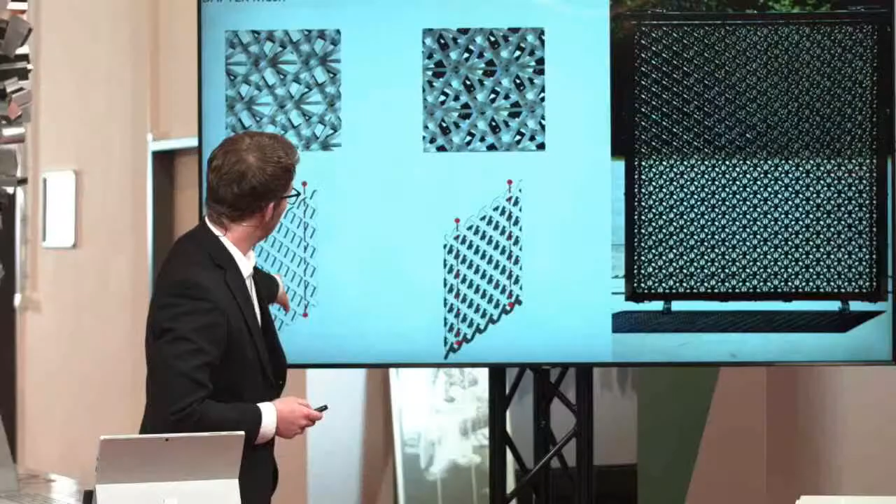The second design is Adaptex mesh, where you can see here you got 2 layers that move against each other. Within one of these layers there are thin SMA wires integrated, and the same way as for wave, once the temperature rises within the system, the SMA shortens and moves 1 layer against the other, which then changes the deformation, and the pattern, as you can see here, compared to the first design, is optimized also to counteract the moiré effect, so you can actually have a nice visual appearance even when it moves.

So you can see here, you have a glass fiber in the front for high reflection, and then a basalt mesh in the back, which moves smoothly between these two stages once the SMA is activated.

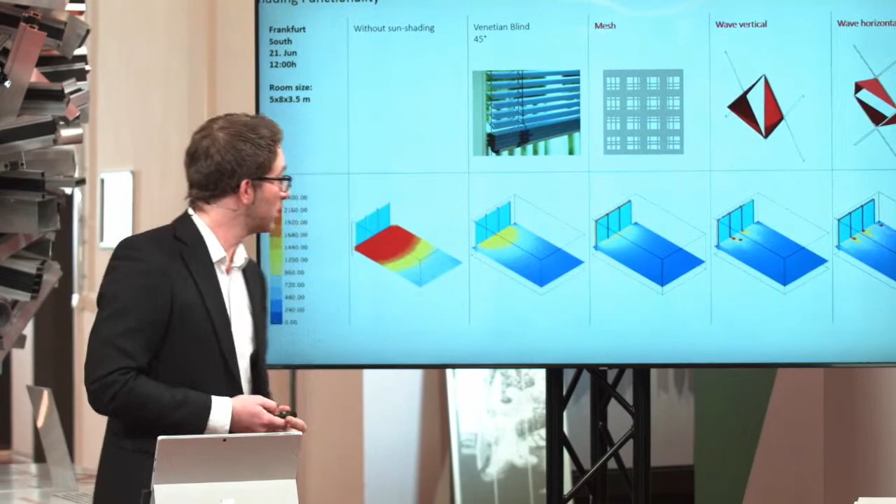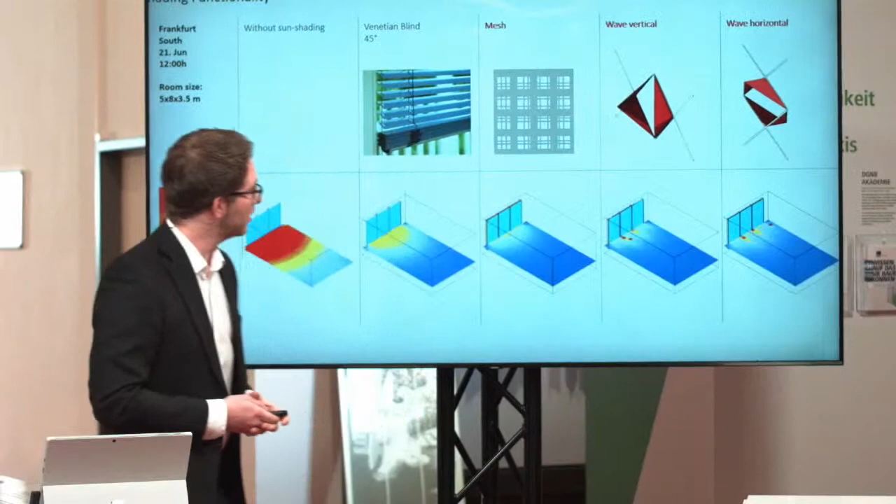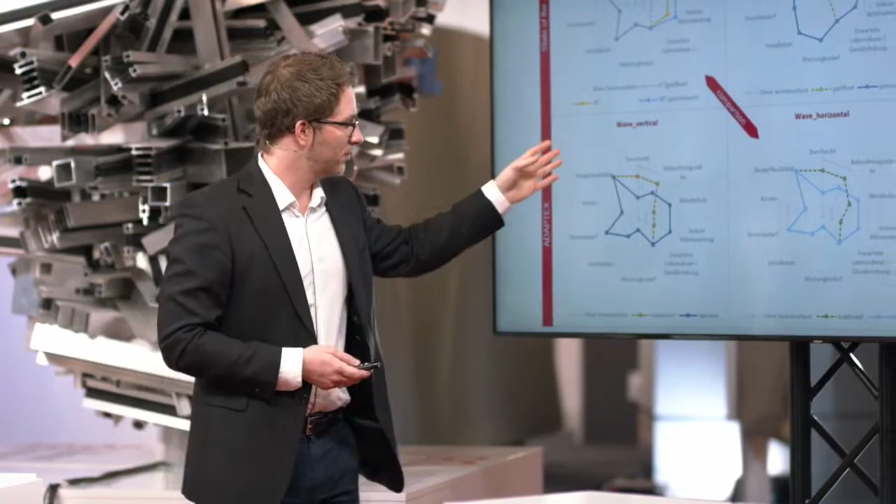And then in these radar charts where we looked into the view through the system, the lighting, the sun shading, glare protection, these issues to compare between standard systems and these developed systems, where you can see by the coverage that actually they perform quite well, also compared to market-ready products.

And then going into even more complex or individually designed or adaptive facades, you can also see that here both wave and mesh, by the coverage of this radar chart, actually perform quite well compared to other built systems that are said to be adaptive or that interact with external stimuli.

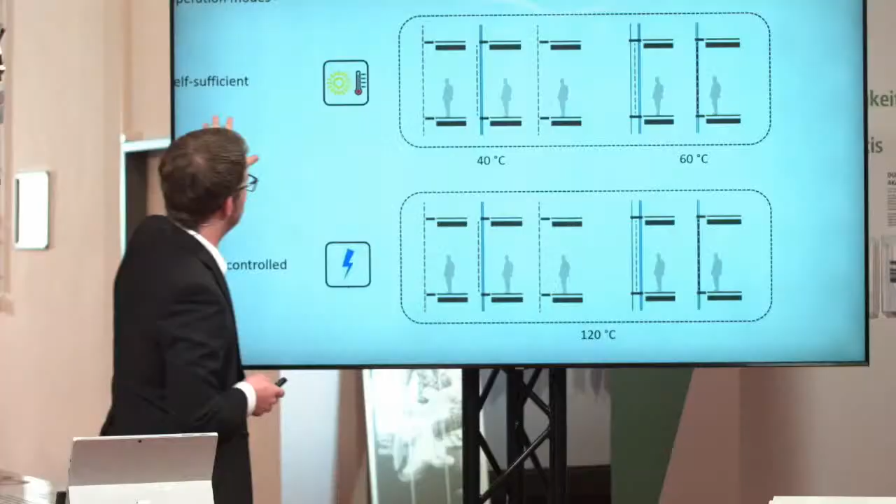As I mentioned before, the SMA can be run self-sufficiently as it reacts to temperature and can be trained and also individually customized. You can either run the system, as on the top, as a self-sufficient system where you have a change of the different stages, so the activation of the system around a temperature of, for example, 40 degrees if you apply it as an external system, or if you apply it within a cavity at 60 or 70 degrees.

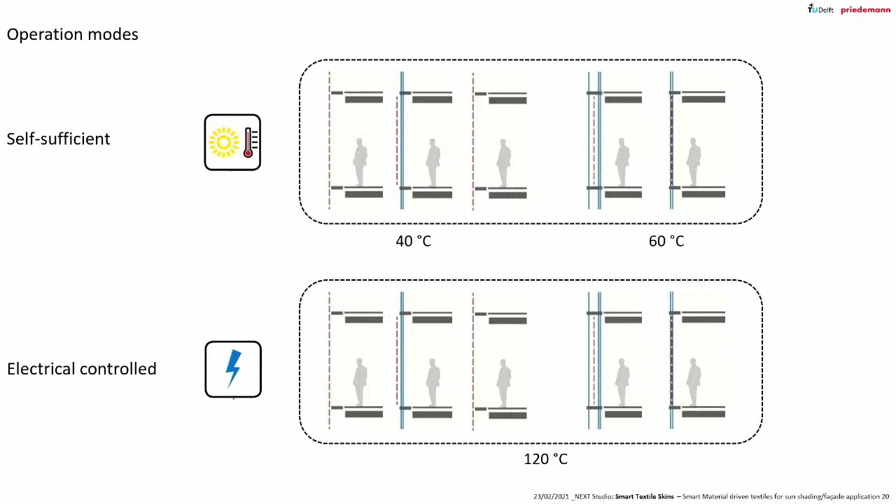Alternatively, you can also run it as an electrically controlled system, so you customize your SMA to be operated at a higher temperature, so it's not automatically activated by ambient temperature, and you apply an electric current to reach this temperature and activate the system.

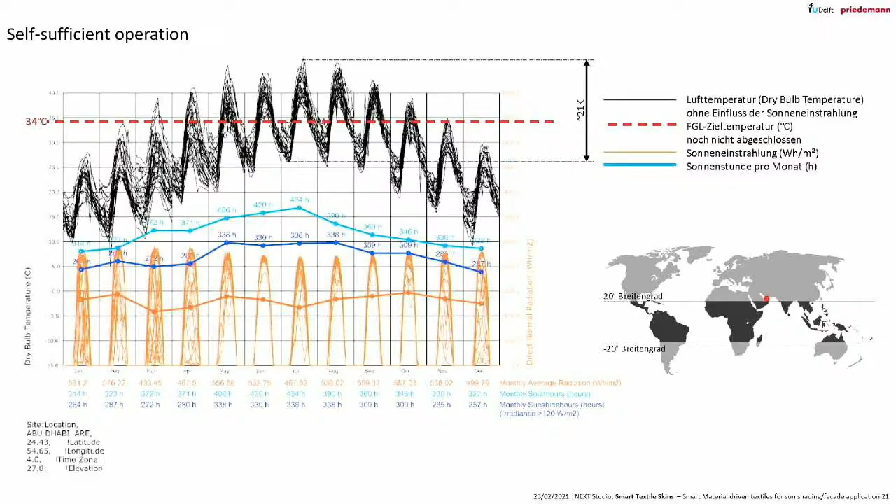We then also looked into how to lay out a system for external application. So if we want to use it as a self-sufficient system, here, for example, Abu Dhabi, if we want to use it outside, looking into what are actually the times of the year and the times of day we want the system to open and to close as a self-sufficient system which is not controlled by any automation system, simplifying the process and making maximum use of this smart material.

As you can see, obviously, there is a kind of difficulty that, for example, if you use an SMA activated at 34 degrees, you have a nice amplitude between day and night. So you could say in, for example, public spaces where you want to shade during the day and you want ventilation during night, you can apply this very well.

As mentioned before, we built first demonstrators, 1 by 1 meter. They're currently under testing at the Fraunhofer Institute for Solar Energy Systems. So we do optical and calorimetric tests to verify the performance and the sun shading potential of these systems.

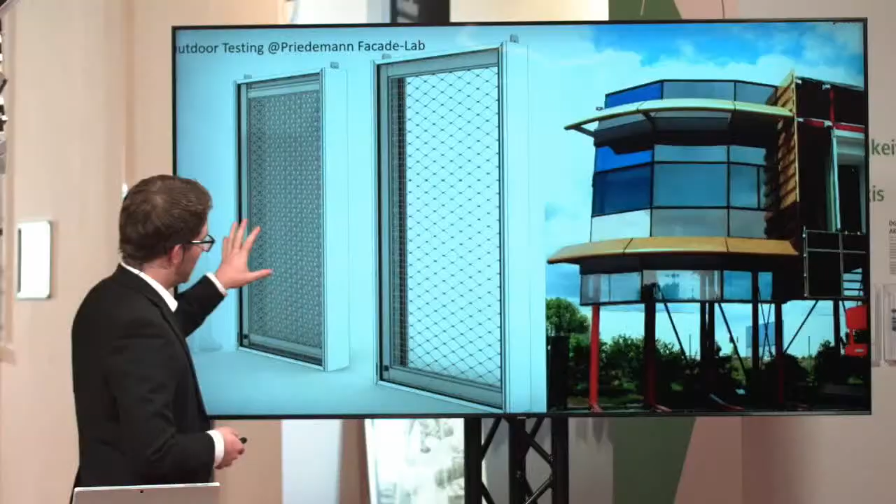We're also currently designing and building larger full-size demonstrators that will then be tested in our outdoor facility in Berlin at the Priedemann Facade Lab. As you can see here, it's two facade units, 135 by 280, with an integrated mesh and wave system within a double skin facade because we want to run it self-sufficiently.

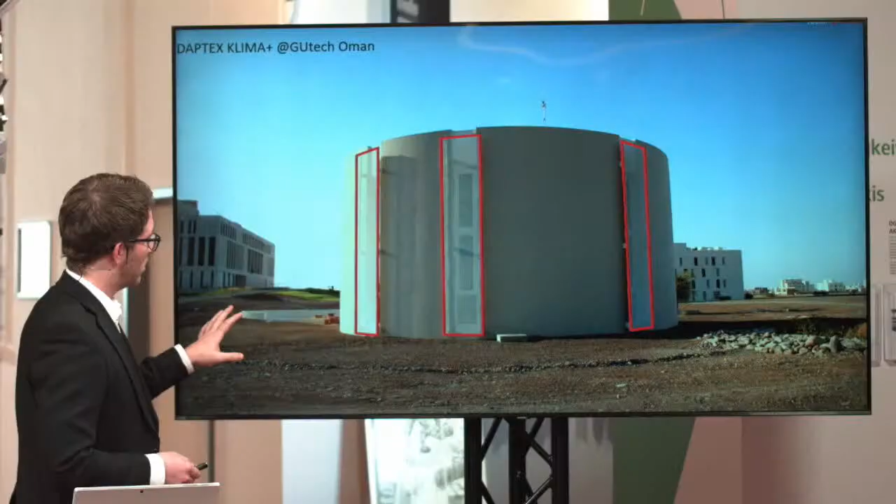And then the next step will be to bring this, as mentioned before, with this climate challenge into an outdoor application in extreme climate. So there we're collaborating with the German University of Technology in Oman to use their eco house where they're testing novel approaches for building construction in extreme climates. And we're applying mesh and wave on these external sun shading areas they have right now to verify, on one hand, the self-sufficient operation, but also compare it to the current metal sheet they're using as sun shading.